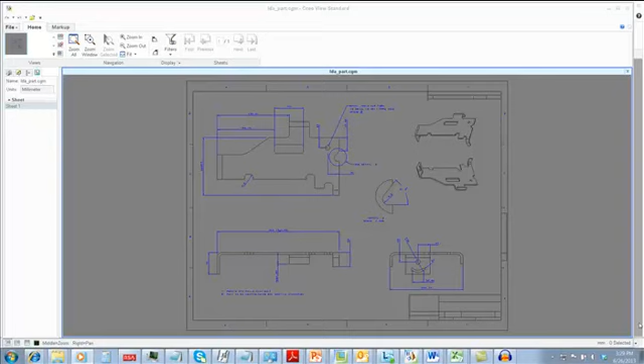We can now see the drawing we are about to convert, and later we can use Creo View MCAD or Creo View Professional to overlay our newly migrated drawing on top of our original plot or CGM file. First, I will import a 2D drawing using, in this case, DXF.

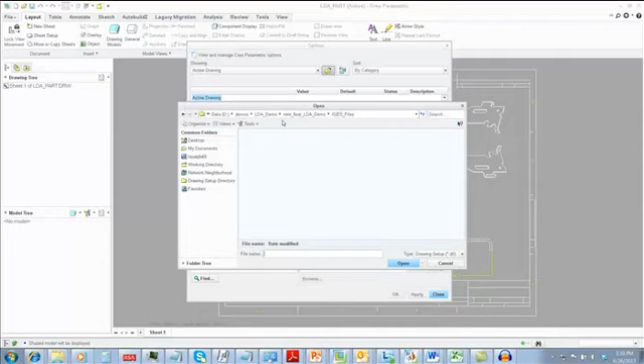I will apply a DTL file to the drawing to assure that my tolerances will be displayed, my arrow sizes are correct, and that we are using an ISO as opposed to ANSI standard for dimensions.

In most cases, the DXF transfer does not include view context, so we will need to explicitly add this to the drawing. See how there is not a dotted line border around each view as with an IGES file.

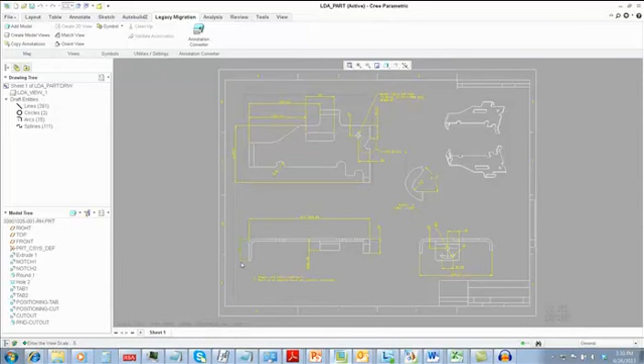Knowing the scale of each view either by interrogating the original drawing or by looking at drawing notes in the plot file, we begin the process by adding the model to the drawing and then defining each view using the Create 2D View command in the Legacy Migration extension.

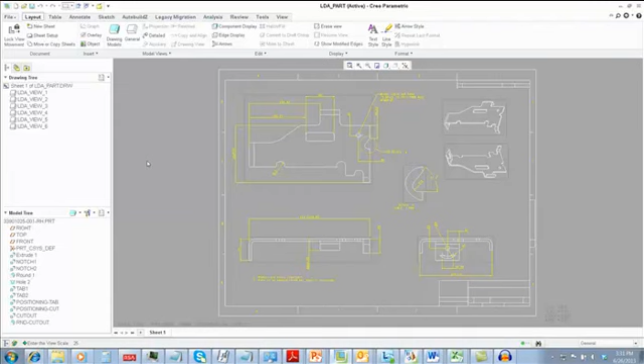When complete, I'm going to toggle back to the Layout tab to add some solid views that look somewhat like the existing 2D views. This first view will be a front view. I will change the default scale of the drawing so that additional views will have the correct scale.

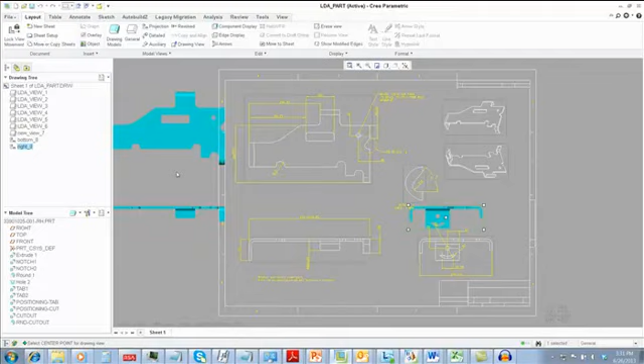Using projection views, I will add the next two views, and finally, I will add a detailed view. Once the orthographic views are complete, I will add the two isometric views with a scale of their own.

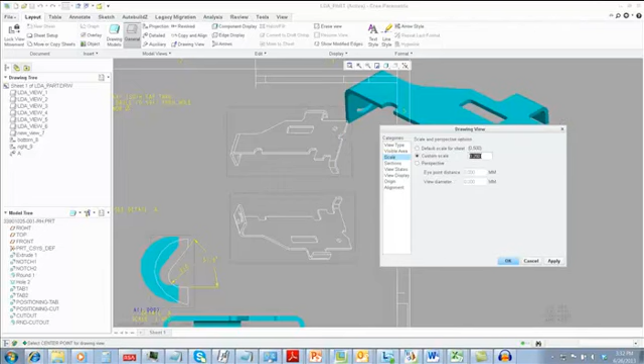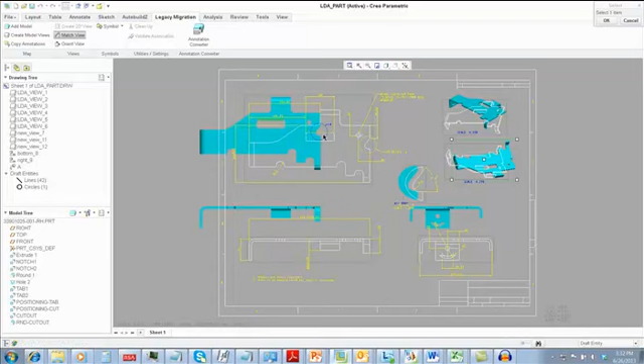When all of my solid model views are added, I return to the Legacy Migration extension. Using the Match View command, I simply pick one entity on the solid model view and the same corresponding entity on the 2D view, and the overlay takes place. I can repeat this process for each of the orthographic views.

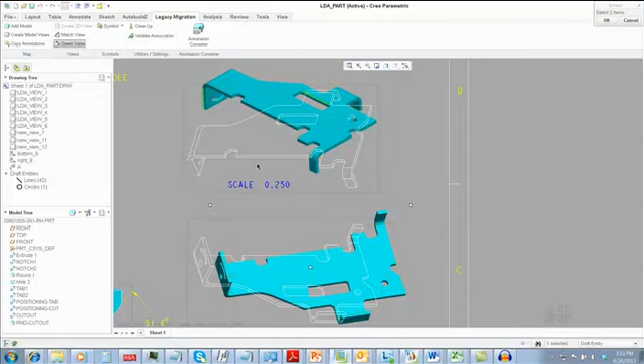Now, I use the Orient View command to map the isometric views. Here, I choose two perpendicular, non-planar edges on my solid model view, and the same two perpendicular, non-planar edges on the 2D view.

This concludes the first step of the Legacy Migration process, which is importing a drawing and mapping views. If you are given a 2D IGES file to start with, please view the recording entitled Legacy Migration Extension, Step 1, using 2D IGES files.